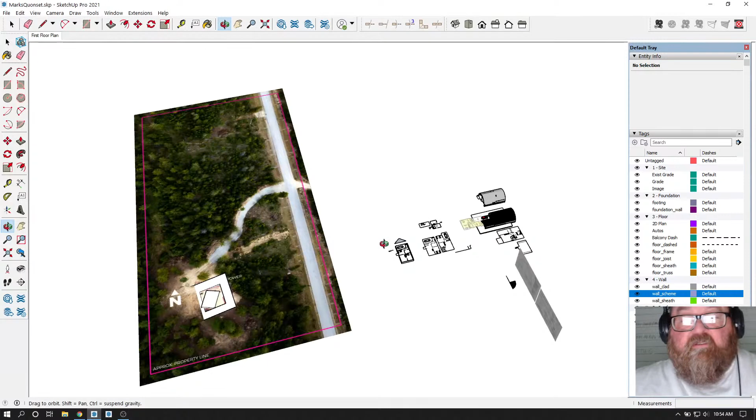All right. So this has been an unusual project for atdrafting.com.

This project started out as Mark contacting me. This was a model that his brother, who's an architect, did - kind of a schematic model. They wanted to build this Quonset hut house, and they actually put down a deposit, and excuse all this drawing stuff here, I'm getting ready to delete it all. But he wanted to build this Quonset building home, so I got the specs from the company and drew

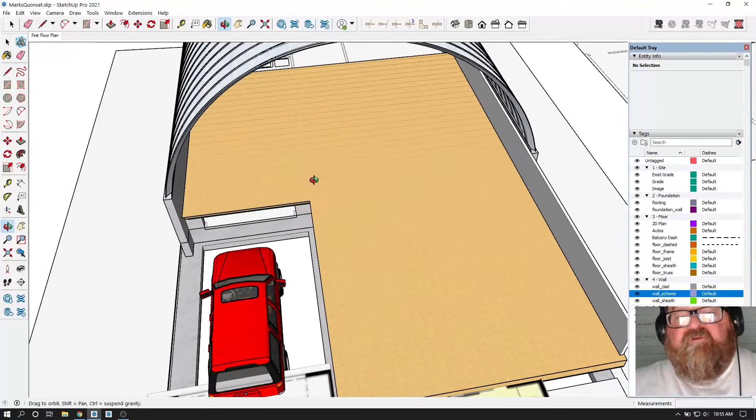the Quonset panels, and we put them all together and came up with a floor plan. And the more we talked about it, you could see I was in the process of doing the floor framing and all that. During the process of our discussions, I was able to, how do you politically correctly say, talk someone into something? Anyway, we're to conventional methods now, so we can delete those.

I don't want to go into that too much because I want to get right to this. But the decision was made to cancel the order for that. There's a lot of reasons behind that, mainly due to hidden costs that you don't see when there's a lot of content on the internet - there's always a backstory you're not seeing, always hidden costs, always issues in real life that you don't see in videos on YouTube.

So that being said, the realism came flooding in, and wisely I think Mark and his wife Pam decided to cancel that, and we were going to move forward with designing a simple house that's going to cost less to finish and is more easily made energy efficient - just easier to design around the spaces they want, easier to build, easier to get windows and doors in around the perimeter.

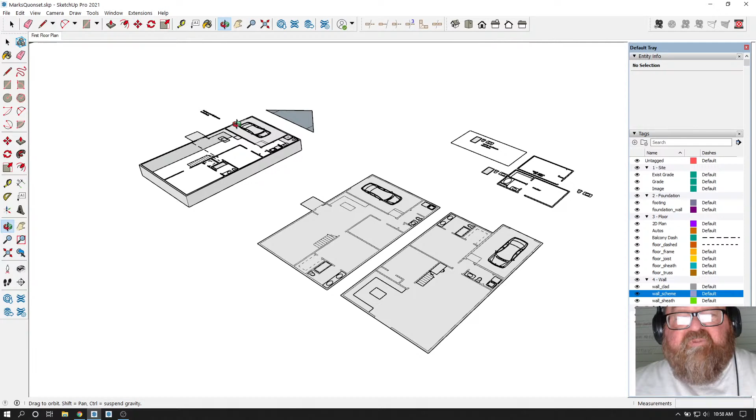And I always love it when people agree to simplicity - that can be, I love simple luxury, let's put it that way. Your life can be luxurious when you're not in debt up to your wazoo, whatever that means.

Anyway, we went through a couple of plan options here. We're trying to shoot for between 1,200 and 1,500 square feet. So finally I drew a rectangle and said, okay, this is our perimeter. We're looking at about 32 by 54, something like that. And the reason it's that big is because we've got this garage we're dealing with, a single car garage.

So what I'm going to do is clean up this drawing. I'm going to get rid of everything I don't need. Let's see, do I have all my plumbing? Yeah, I've got all my symbols, all that.

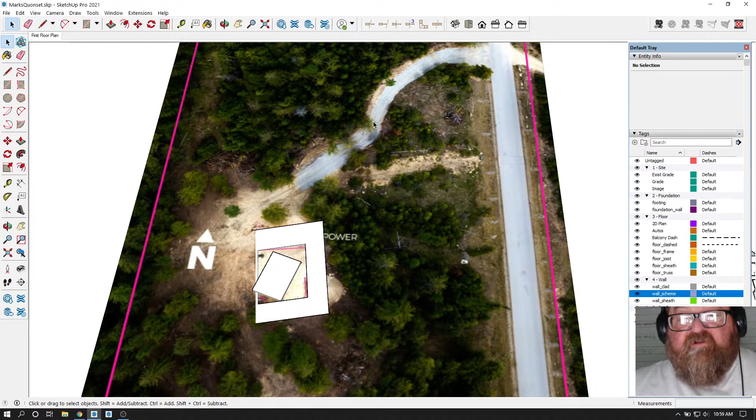I'm going to keep this site. This is a picture he took with his drone - pretty good picture, actually. Let me look at it straight down. The lot basically runs north and south, so we've been playing with how to orient the house to get the best approach into the garage and their view and all that. So we came up with this where I was trying to get grade information - that's this slope right here.

It's kind of a long story, but the contractor cut out this notch in the site because he needed dirt for the driveway somewhere. So now we're trying to rotate the house to best be suited on the site, and then all this will be regraded after the house is built. So that's kind of the pre-story, the backstory.

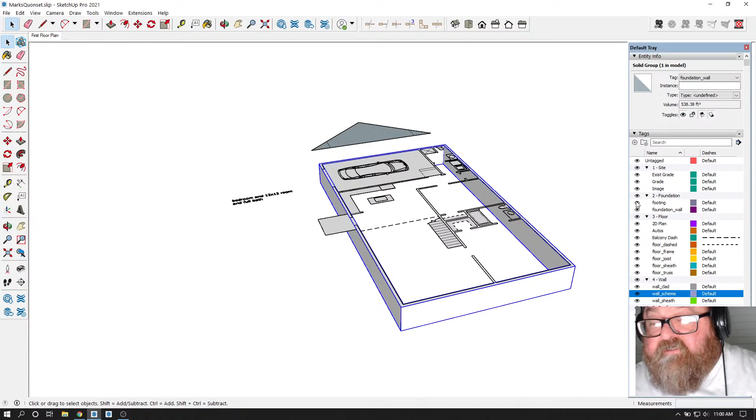Now what I want to do is get just some quick layering stuff done. I want to put this in foundation wall, and I'm going to turn that off for a second. I was kind of showing him some sectional work for the attic - I'm just going to delete that because I don't need that anymore.

Y'all have to remember I'm hard of hearing and sometimes I slur words. Anyway, let me see if anybody's watching. Hey, we've already got a bunch of people watching. That's cool.

He hasn't checked comments yet. I'm checking them. Nothing can cost less today. Oh yeah, everything, oh yeah. We can always have a project that costs less than one you originally dreamed up. Trust me, I'm an expert on that. And this is one of them.

We went from a Quonset building to traditional framing, which still is going to be cheaper. Mark and I have gone through this evolution.

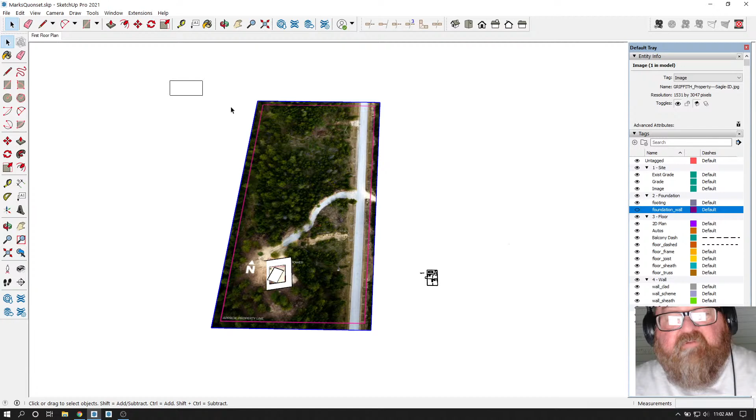Let me continue to work while I'm talking. I want to put this image into this. Oh, it's already good. But what I want to do is rotate this, make a group out of all this, and then place it. I want to start getting things straightened up in this drawing because they've been a mess. I'm going to put it right. Get over there, get over there. There we go. Now I'm going to rotate the...

Because I want to work with my drawing on this axis, it's easier to work with. I'm going to rotate the site. And you know what I should have done? I'm not going to worry about it, I'm just going to rotate this.

So that I can work on the building. I'm going to delete this one because I don't need it. Let's see, let me explode that. So there we go, now I've turned my new foundation back on.

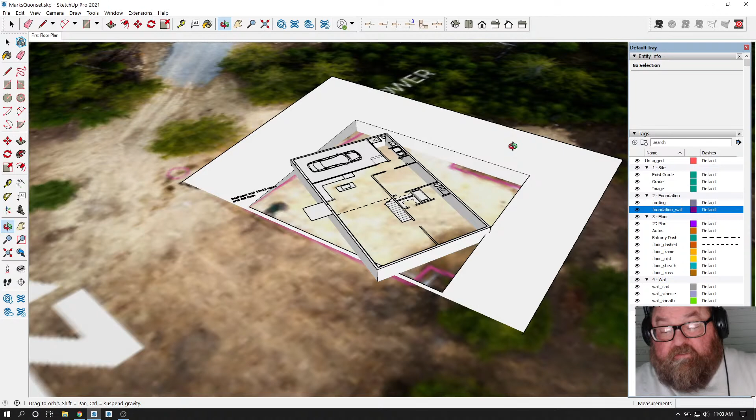Sorry, I was getting a text from another customer. So that's going to look good.

So now I can turn off some of this stuff to be able to work. Let's see, is this grade? I want this to all be a group, and I want it to be the grade layer, so I can turn that off. And now I can just work. I want to turn off the foundation.

And I'm going to draw myself a rectangle. It's going to be my floor plane, the floor. And I know it's going to be about 12 inches thick, it's going to be my floor system thickness. So I'll make that a group, and I'm just going to leave it right there for right now to give me a background.

To zoom in, because when you're over here in space, sometimes SketchUp goes kind of nutty. But what I'm going to do now is, let's see if I've got this in a group. Do I have this in a group? Let's see, is this 2D text? This...

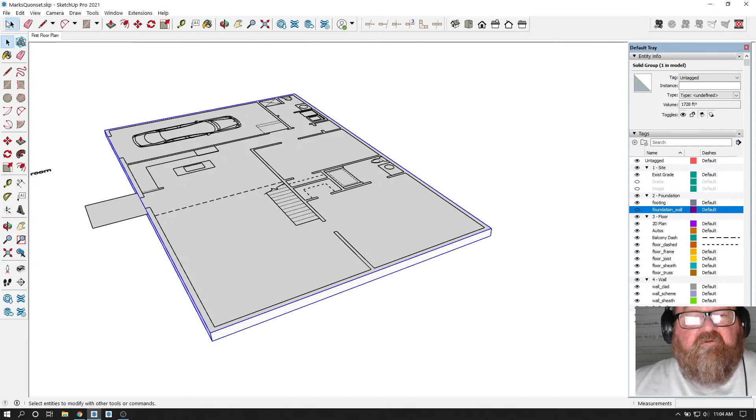Let's turn it off. So this needs to go—sorry, there's a bit of organization here. Let's see, I need to put this in floor frame, and then turn that off for a second. And these videos are really for the owner, but I like to do live streams because that way...

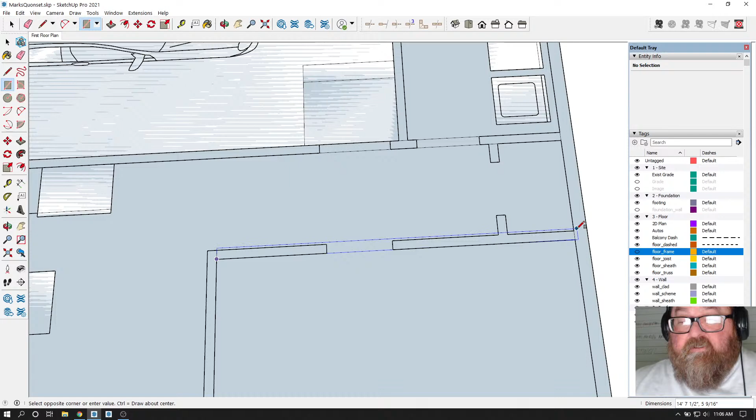What I'm going to do is I like to keep a two-dimensional plan. Like I used to take this two-dimensional plan and just raise up the walls that I had already drawn. But now what I like to do is keep that two-dimensional plan as a separate item, a separate layer.

Let's go in here and see if I got all my walls. I can tell by—oops, wrong one. This, that, yeah, so now I can go around, now I can turn off, put this on 2D plan, turn that off. And now I can go and clip out all these little lines between the walls. Oops.

And the goal here is to get this up in 3 dimensions so that we can start to talk about space and time.

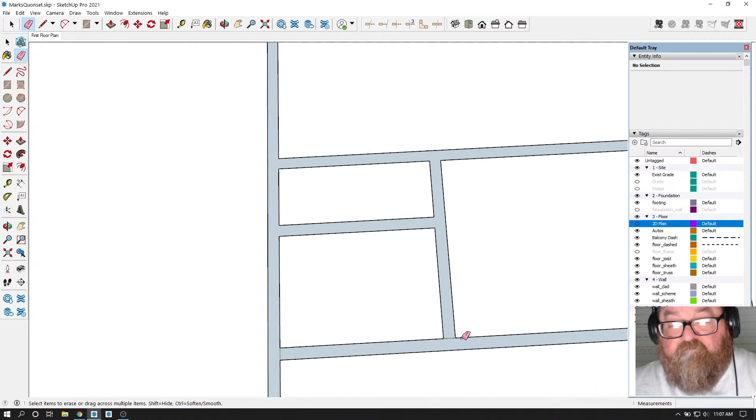Something happened where I didn't get this connected, so I'm just going to draw. I really don't like doing that because I'll end up with lines I have to fix later, and you'll see what I mean when I pull this up. There will be little interference lines there now.

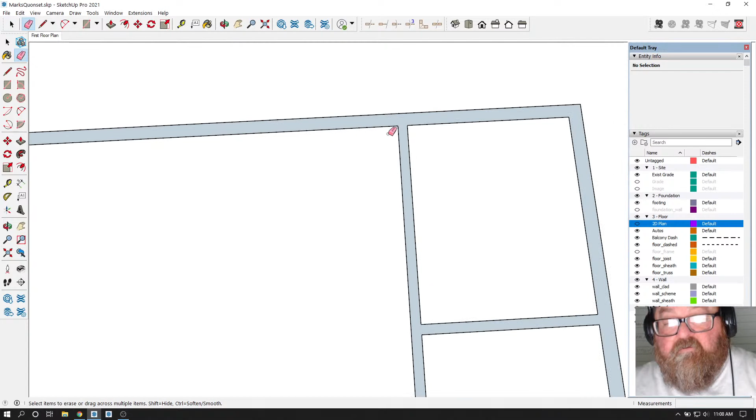Okay, got that, probably missing some down here in the corner. Now we're going to have 9-foot walls, and 9-foot walls are 9 feet 1 1/8, because your studs are 104 5/8, and then you have 4.5 inches of top and bottom plates. So if you want to draw your walls correctly, 8-foot walls are 8 foot 1 1/8, and 9-foot walls are 9 foot 1 1/8.

We have to start out with, if we want a project to meet our budget, a little under what we like. If you think you can afford 1,800 square feet, design it to 1,500 square feet, and you'll get into, you'll fit within your 1,800 square foot budget.

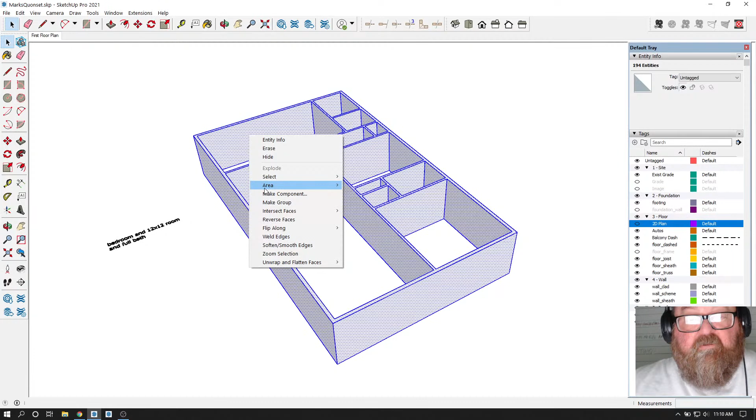So that's our walls. Now I can make these a group, triple click and group, and those will become, I like to put these in the wall scheme layer, not the same layer as later on when I start doing real walls, I'll use Medeek's extension, which gets into framing and siding and sheeting. But for now I like to keep it on schematic mode until we get past the schematic phase, which is your first real kind of thing phase.

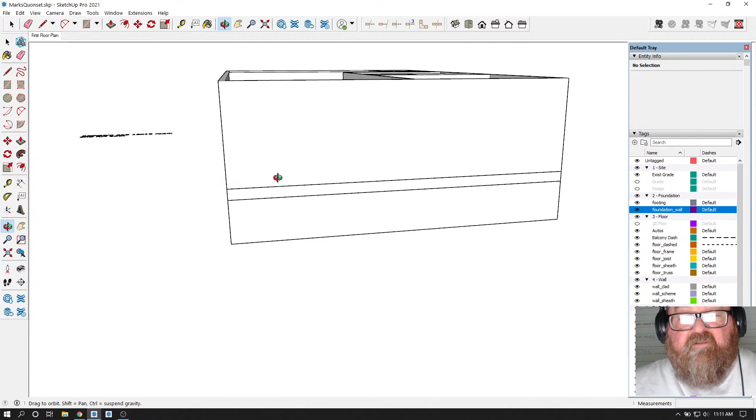Let's turn on our floor. I don't think I have the floor on the right elevation. I do. It may be that I don't have the foundation. Let's see, foundation walls. There we go. So there's your kind of layer, your plates. We've got our foundation plate, our floor plate, and our wall plate. Eventually all this will be replaced with real stuff. This floor plate will be replaced with real joist and subfloor and flooring, and this layer will be replaced with real concrete block and piers and footings.

If you've watched any of my other videos, you'll see that coming soon on this. But this is how I like to do it, just to get past the discovery phase.

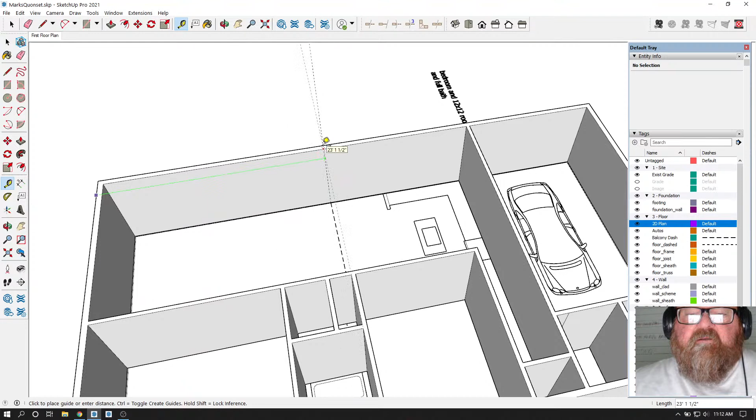The interesting thing about this house is we are going to have, let's turn on our 2D plan again, a loft area, sort of a second floor area, starting right here where this dashed line is. I want to make sure that's a good dimension, maybe 23, 1.5, or 30 foot 10.5. Maybe I shouldn't worry about it now. I like for things to be logical, like when I'm talking to my framer, I'd rather say the loft starts at 24 feet or 23 feet instead of this ambiguous 23 feet 1.5 thing. But in this case it might have to stay because I've got that loft lined up, I thought, with this wall.

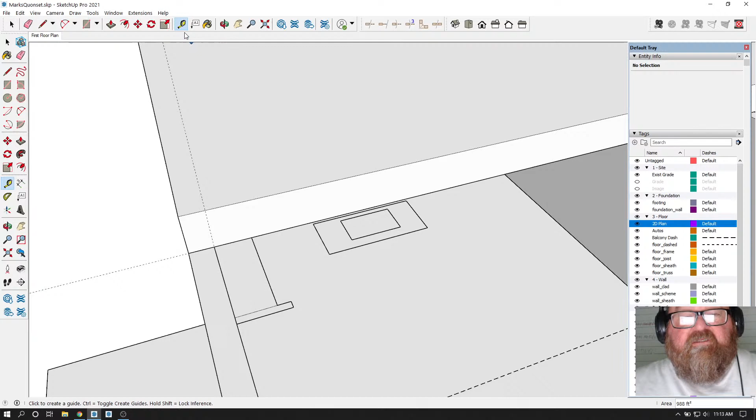And so we'll discover that in a minute if that's true. Now I'm going to draw a floor plate right there, and I know it'll be about 12 inches thick, let me make it 12 to start out. I've got this distance right here to consider, 16 feet. It'll be 11 7/8 plus, let's go down, we'll use 1/8, then we'll come up 3/4 for our subfloor, and we'll leave it right there for now.

And then we'll make that a group. What that will do is show me, no, it doesn't exactly line up with that wall. I think what we did was we made some adjustments to this wall based on adding this little closet right here. Let's see if I have any more comments.

See, I wore you all down. No more comments.

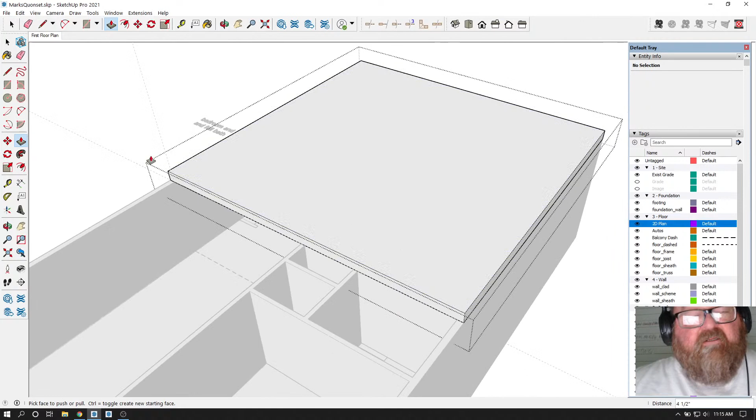Like I say, these videos are for the owners. I do them for them, but I like to share them with everybody. They will get boring for people who aren't involved in the project, so I can't make it any more entertaining. I'm sorry. Work is not always entertaining.

Do I want to tell the contractor it's 30 feet 10 and a half or not? That's for my framer. The other thing I'm dealing with is I want this entry here to be centered, and I've got 6 foot allowed for it, and that's basically where it ends up. So I'll leave it there for now and be embarrassed when my framer asks how far that comes over. Actually, it'll be dimensioned on the plan, so that's okay.

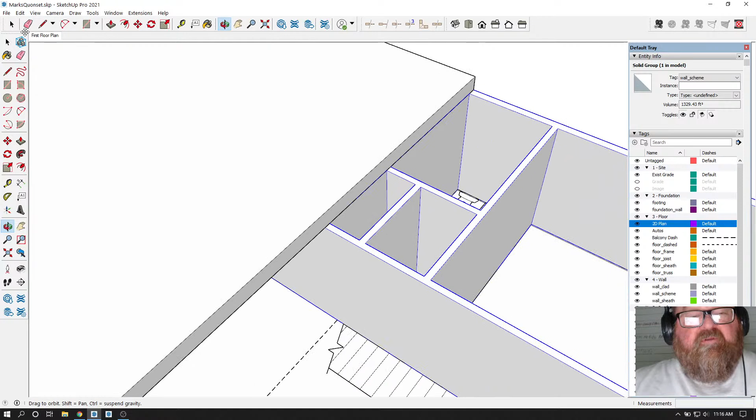But the main thing here is we have to decide where the vault goes. What'll happen is this wall, and I'm going to have to draw my roof shape to know, but this wall right here is going to extend all the way up. So I'll have a line here and I'll have to separate these walls for now. I'll put another little line there and there, and separate it here too, so I can pull this wall up until it meets the roof.

And then these are those little interference lines I was talking about that I have to go back and delete if I want it to look pretty, which I do. I want my models to look pretty. So now let's see, did I wear everybody down? I did, I wore them down, so now I can work.

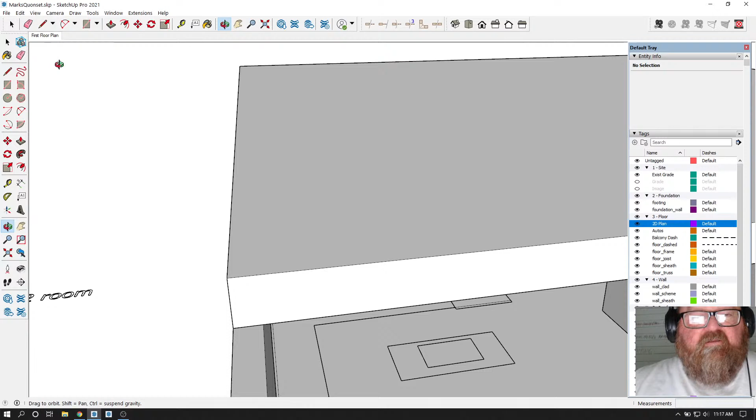Now what we're going to do is draw a roof plane, a roof layer, a roof schematic, and I'm thinking I'm going to have a 3.5 inch seat cut, and then let's go 12 inches, and then we'll come up 10.

Where's my blue axis? 10, and then we'll—is that it, is that my 3.5? Yeah, that's a minimum seat cut for me that I like. I don't want anything less than that, because I'm not sure exactly what I'm going to be using for rafters. I'm pretty sure it's going to be 11 7/8.

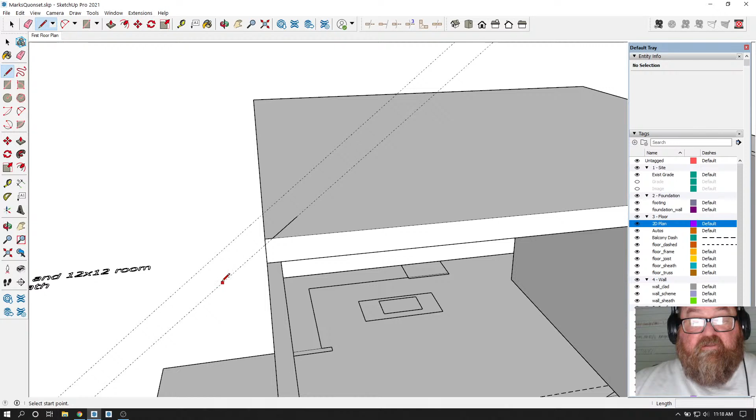Let's see, I may want to—I'm going to have to research the seat cut and see how I'm going to use these. I'm rambling, I know, sorry. The wood I-joist that I'm going to use for rafters—one of the issues we're dealing with on this is that we have a 60 to 70 pound snow load.

And why didn't that connect? Why did that not connect? There we go.

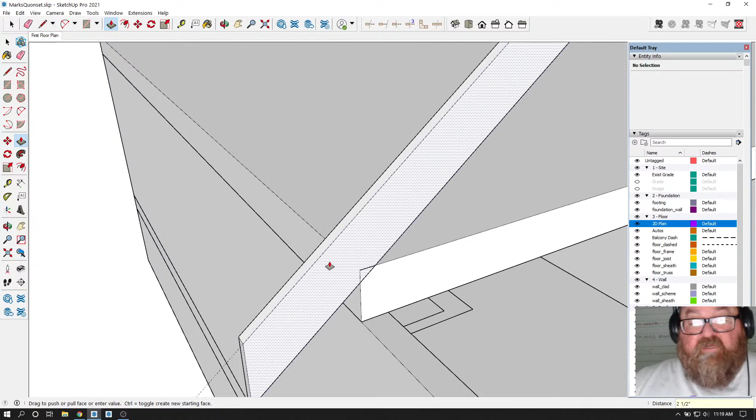What I think I'm going to do is go ahead and draw these, I think they're 2.5 wide, and I'm not going to draw the whole thing. Let me make that a group. Actually, I'm going to make this a component, and later on I'll make it look like a wood I-joist, because what I want to do is copy it now.

What I do want to have is something that's real enough to get my headroom properly shown. 180—let me get over here, I can see that.

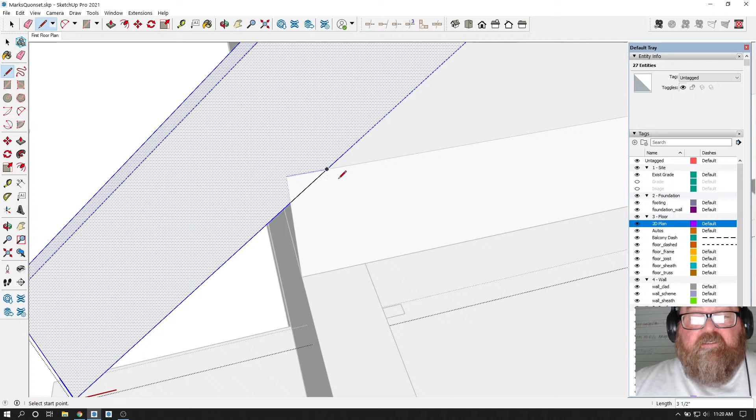I didn't draw my bird's mouth on there. Let's go over here—see, since that's a component, I can go back over here and draw my bird's mouth, and it won't show up. Well, that's weird. Looks like I did have it there. No.

Why are you acting strange on me? Let's go all the way over here and come all the way down here. Why's that acting funny? Sometimes—oh, it is working. Okay, I just couldn't see it.

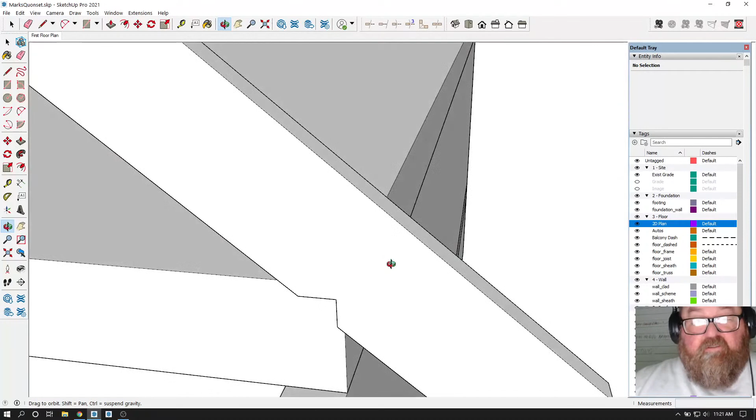Oh, I know what it was—that guideline, delete guides, was interfering with my ability to see the line I had there. So the reason I did that is because I want to know where that bird's mouth is, because this is supposed to be notched out all the way across, and it's not, but it is on this side. Now I've got to figure out why it's not over here.

Just—what's that song? Constant sorrow. I'm a man of constant sorrow. Well, there's the bird's mouth—it's like it magically appeared on this side. Me and Barrett need to cover that song.

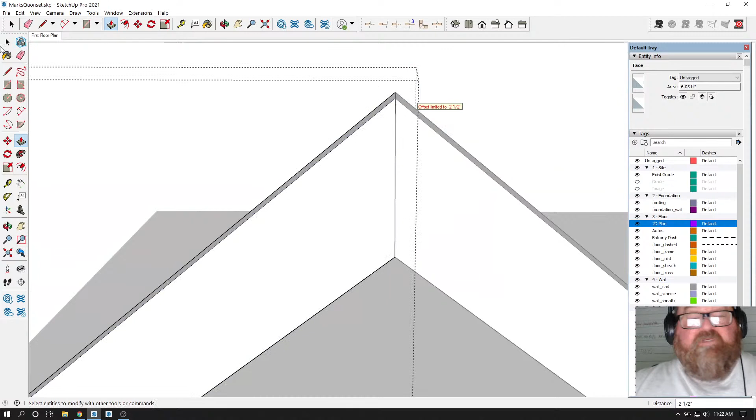Alright, so that, and we'll have a ridge beam, and you'll see why I made these components right now, because now I can just draw myself a little line right here and get rid of that. And magically the other one's going to fix itself. It's magic. Now eventually I'll have a ridge beam and all that.

You know, a ridge—not a ridge beam, but a ridge, no need for it to be, could be a beam. The difference between a ridge and a ridge beam is that a beam is more or less supporting, it becomes a structural member supporting the rafter load, or this half of the roof load. Therefore, you can kind of eliminate the need for rafter or collar ties and that kind of thing.

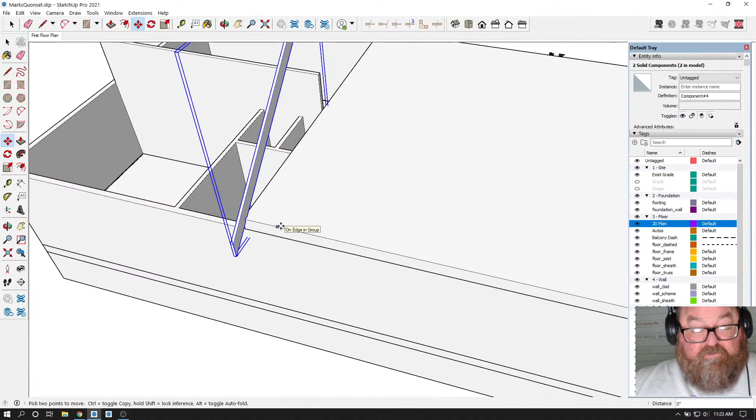Over a vaulted area, I like to have a ridge beam, and that way I can keep it a true vault. I don't have to have these weird flat spots unless we want them, or unless we want an area to run ductwork or something like that. But we want the choice. And these are going to have to be on 16-inch centers because of the 60-pound, 70-pound, whatever it is.

I think I'm going to put 30 of them in there for right now. And then I'm going to move them all down to the end so I don't waste them. Don't want to waste my stuff I made. Yeah, let's just grab a bunch of these and we'll...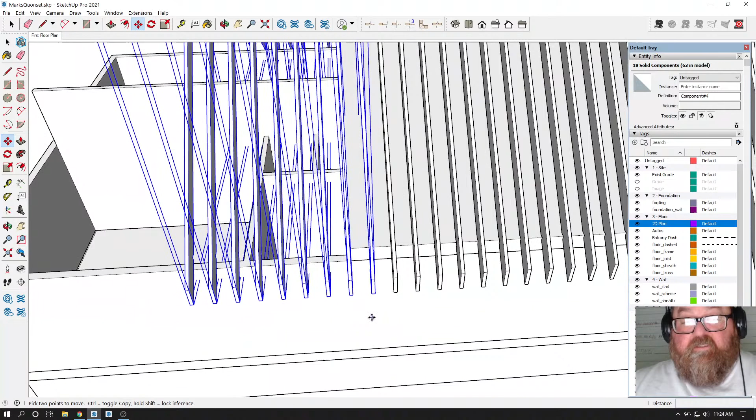Got close, didn't I? Let's go one more. Why does that look like it's closer? That's because they're wider than a normal rafter. Aha, and we just exposed our first issue, that this wall, or these walls, will have to be raised up.

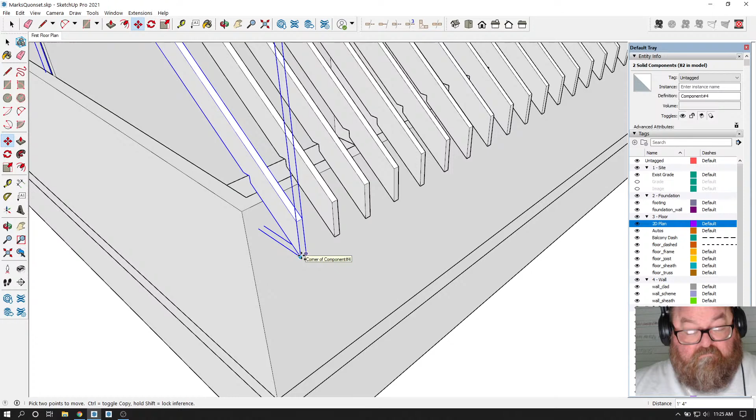But let's put these on here, because what I'm going to do is - why did I delete that? What I meant to do was copy it and then put one flush with the end, and unfortunately that's going to be close together. It's no big deal, it just has to remain on our layout. Oh, I know why I deleted it, because I wanted to copy - I wanted to keep these. I wanted to copy both sides at the same time.

And I'm going to suggest a 2-foot overhang. So for now, I'm going to run out 24 on both ends. There we go.

And now I'll put those in my roof framing layer. I refuse to say tag. I'm not going to yield to SketchUp's new tyranny, tag tyranny. I should write an article, tag tyranny. Roof framing, roof frame, there we go. Now I can turn those off.

Because I know - see if I have any other comments. Nope, wore everybody down, I wore them down. Am I still, yeah, I'm still live streaming. Am I? Okay, good. All right, so now what I'm going to do is turn those off.

Roof framing. Roof. Where? I've got things that are out of - all this needs to go in. Wall, and I don't know why there's a space there. Oh, I know what happened, I did that. I was demonstrating that extension, and that's how I ended up with all those layers.

Roof. Let's see, did I not just have a layer roof? Oh, that was floor frame, that's what I did wrong. So what I need to do is create roof frame, and put it in there instead. R-S-T-U-V-W, I know my alphabet.

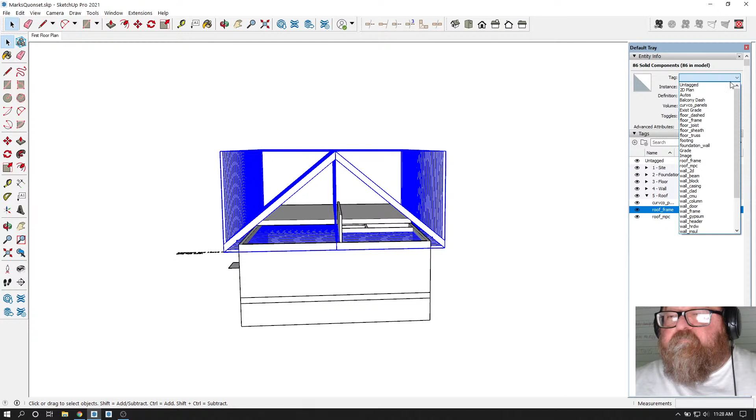They all need to go in there. What I really should do is - a good CAD standard practice is to keep all these in the untagged layer, and then make a group and put the group in the layer you want it to be in. Don't put your geometry in the layer, put your group in the layer. That way you can nest the groups in different layers. Let's see, roof frame, there we go. Now I can turn that off and I can raise these walls up.

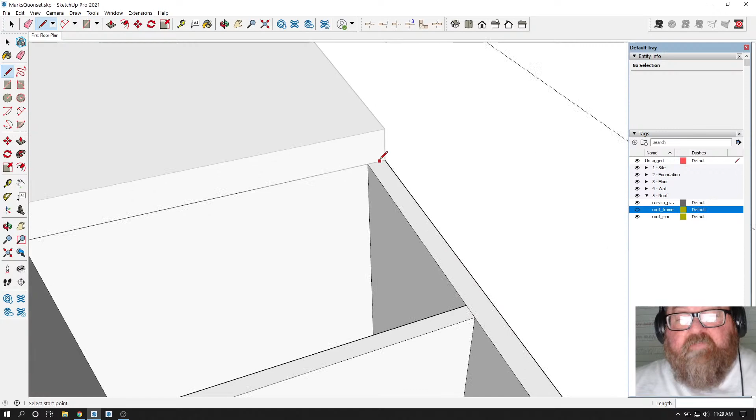So this one, I should have left my little lines in, shouldn't I? Would have made this easier. That's already separated, just separate this. And now these walls will have to come up to there, see?

And actually what we like to do is run a plate on top of this floor system. So it'll actually come up another 1.5 inches like that. And then we'll have a plate that we're going to call part of - what are we going to call it? We'll call it part of our roof framing or something. Let me think, and we'll come in.

Let's see, that'll be 6. Let's see, we got 6. Is that - why does it look like it's more than 6? My eyes are watering for some reason and I can't see a freaking thing. 6.

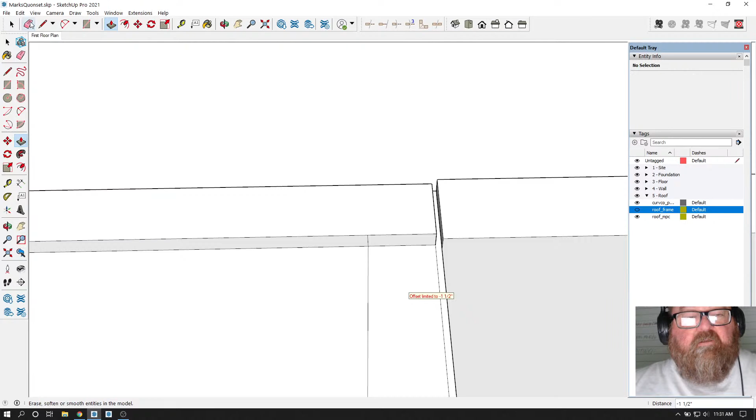And then this will be a 1 1/2 inch, and then that's your plate. That's a little more detail than I meant to get into right now, but I was afraid I would forget to do that later on. This won't be there, it will just be around the edges.

And I need to - why is that doing that? This is its own thing.

That needs to be deleted. This needs to be butt into that. You see, this is a plate nailed down on top of the floor, so it's going to be set back a half inch. And I know I'm getting into a little too much detail right now, but I don't think it's going to hurt anything.

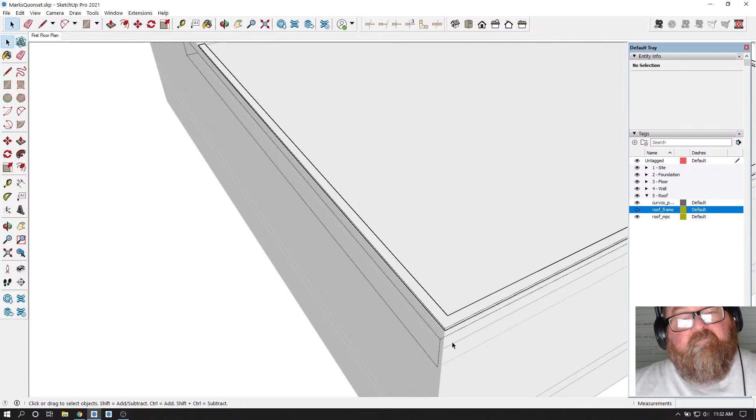It'll just be something there that I don't have to do later. And the reason we do this is because we like to have something solid wood to nail our roof system to, instead of the Advantech that's going to be the subfloor. We don't want to set our rafters right down on top of the subfloor. We want to have a plate there. And that plate, nailing that down, determines the height of this wall.

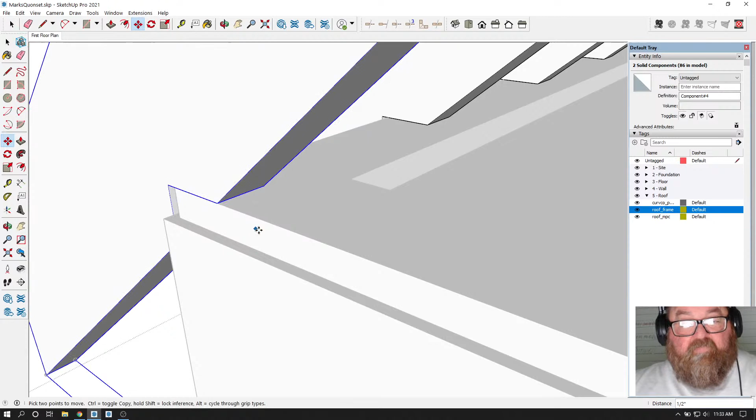And if I turn my roof framing back on, since I have it all grouped, I can just take that group now and raise it up that half inch. And these house line rafters will be on that house line framing, because you see the wall sheeting will come up and go by them, will bypass them.

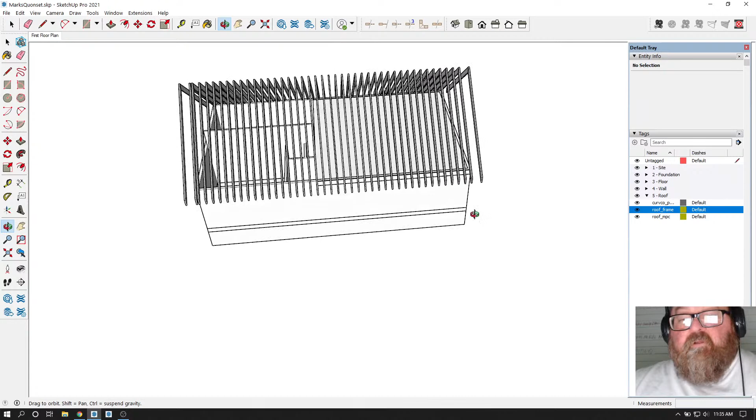Same thing down here. Something happened to my... there we go. Let's see if I did this one proper. Is this 24 from here to here? Oh, it's that half inch that's messing me up.

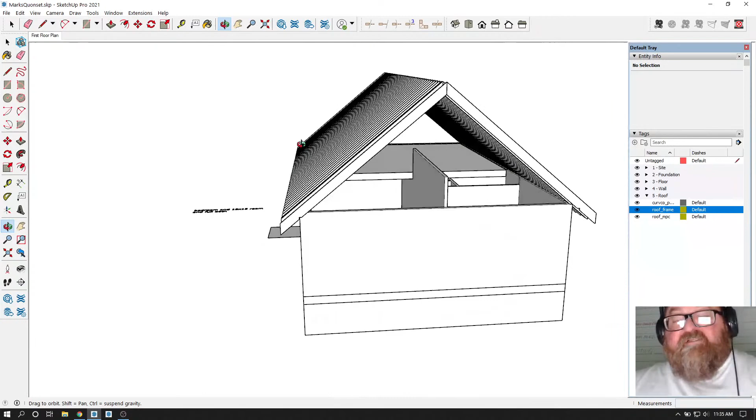So I need to move this back a half inch. And again, I always catch myself getting into this much detail early. It's honestly hard to keep yourself in a sort of schematic mode, because the first thing that'll happen is the owner will want to change the pitch of the roof, and here I am getting into that level of detail when I'm just going to possibly have to change it. Which is fine, that's their prerogative. But I have to train myself to keep from that.

And the whole point to that was to know how far this wall is going to have to come up. Or I just want to be able to show it.

Oh, hey. Are you going to work? All right, be careful, son. Alex is going to work. He's managing Taco Mamacita. He's doing really good.

Why is that not... oh, I know what it is. That wall's set back, so I'll have to kind of come in here. For now, what I'm going to do is just show it right here, and later, like I said, I'm training myself. Later I'll come back and make it a wedge, and cut the angle on it and all that. I just want to be able to see, give the owner an idea of what this vaulted ceiling is going to look like here.

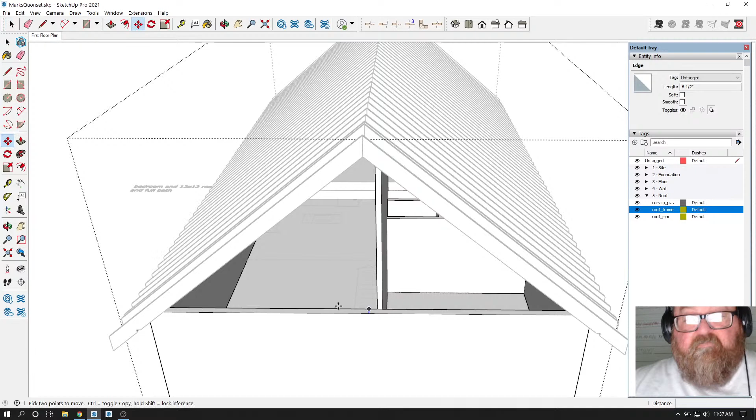What I can do is put myself a mark in the middle of this wall. Yeah, I knew it wasn't exactly in the middle, and then I can raise it up. I think I can raise it up without getting interference. No, I can't, can I? Because of this wall, so I'll have to draw it. No big deal.

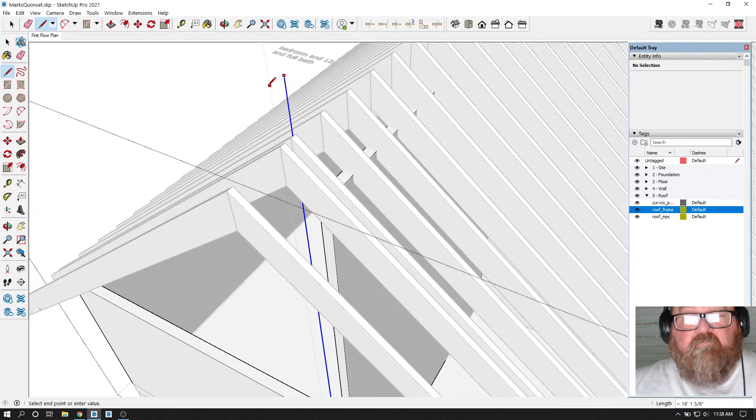So that means what I'll have to do is just draw this up to... well, how can I get to where I can see? Probably what I can do is just bring myself up two lines for now like that, and then bring up this thing like that.

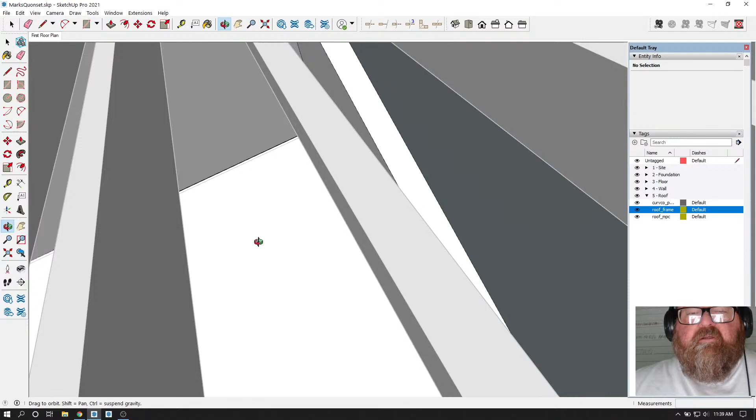And then delete that like that, and then do the same. I should have done the inside first, it would have been a lot easier. Now I've got to manipulate myself around and through this maze of rafters.

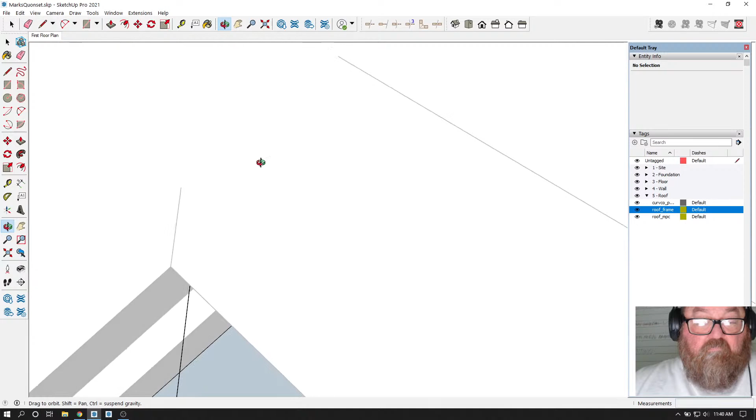There it is, I found it. Right. I think I'm just going to leave those horizontal lines for now and just get rid of the vertical ones right there, and these like that.

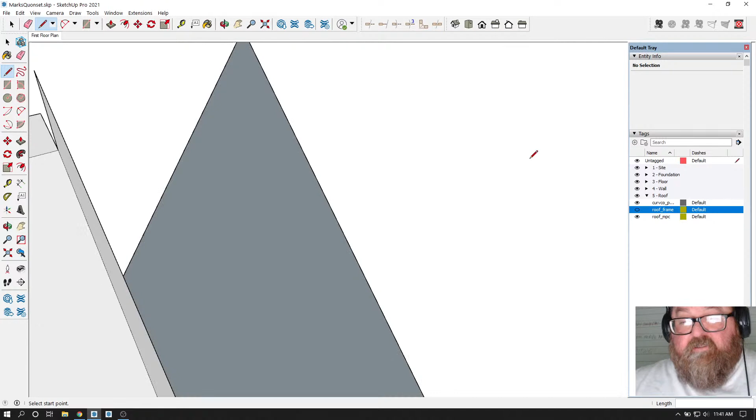Then see, we can turn the roof off and draw ourselves a line. This will be easier. Oops, I need to go back into the group and edit it. That will give me my little... bring this over and bring this over.

And see, now I've got a different wall over here, a different situation here. I've got to bring this over like that. And then this is where I'm wishing I had left this alone, but I'm going to go ahead and just draw this wall. Let's see.

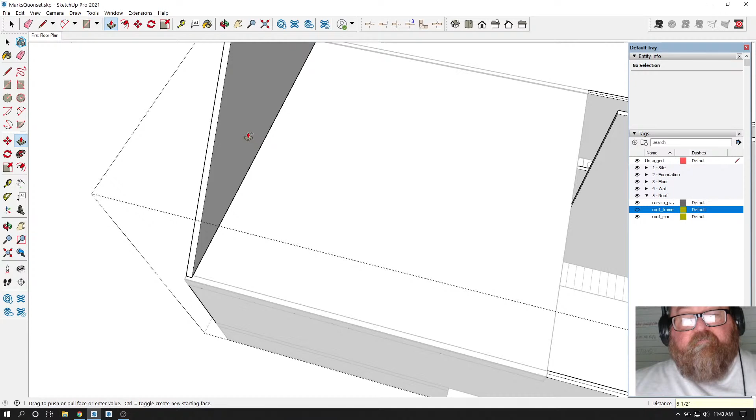And then I can just make this 6.5 like that. And then I can turn on my roof again, and I'll have it in the wall kind of where it's supposed to be, and reverse that. Oops, what did I do?

There we go. There we go. Now, let's see, what I'll do is go ahead and make myself a plane. One thing I just realized is I never really fixed the overhang of these rafters, but that's easy since they're components, because this would be 22.5.

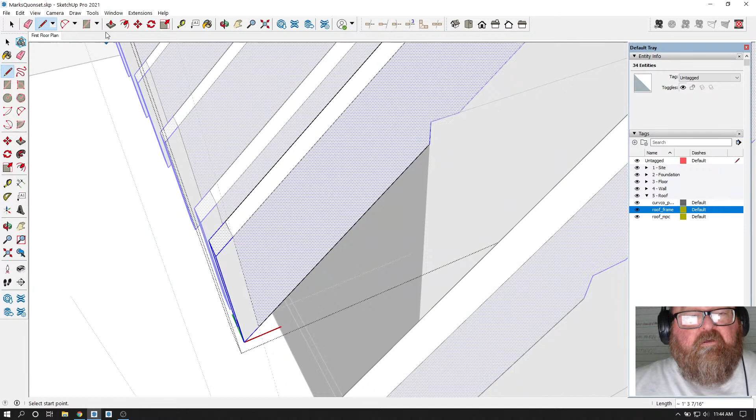Should have drawn that straight down. Now I can draw myself a decking plane. Let's see, I want to be out of the rafters, I don't want to be inside that group, I want to be outside that group. Is it not going to let me? That's weird, why wouldn't it let me go all the way to the point up there? I'll move it up there.

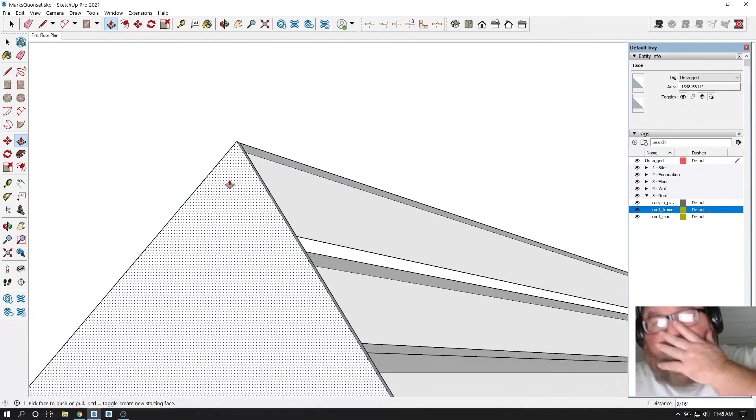And then we're going to make this at least 5/8. And make it a group. And that's going to be my...

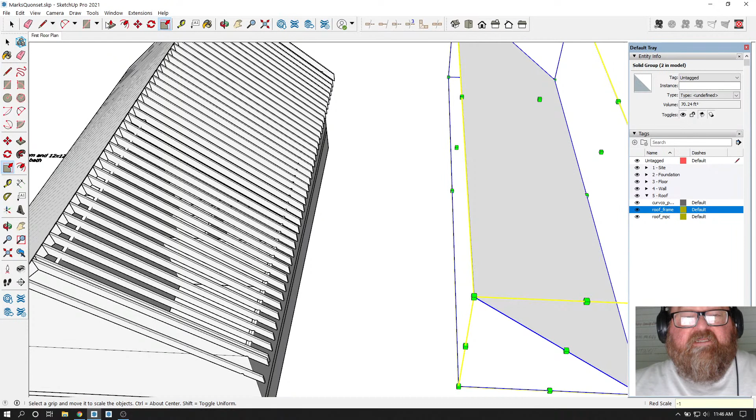Now see, Ray, I know you're not still watching, but if you are, you need to go tell SketchUp how to fix this issue where, depending on what angle you're at, you can see through. You see, I can see the rafters through the decking, even though it's 5/8 of an inch thick, and these are not transparent surfaces. You can still, and as a scientist, I think you could fix that. This is one reason why I'm kind of hoping they're aliens, because some of the things that humans are too lazy to fix, like cancer and all that, and why, and I'm not making light of cancer. I think we could fix that if we tried hard enough. If we can come up with a vaccine for a pandemic in a year, we should be able to fix cancer after 50 years of research.

Anyway, I won't get off on that tangent. So that's kind of a rough look.

So now I need a layer called, what have we got? I need roof sheathing. Roof sheathing. And I'm trying to keep these, I call it roof decking. Anything that's not vertical, I call decking. Like wall sheathing is vertical. Floor and roof decking is like the deck of a boat. You know, I like to say roof decking. But I'm trying to keep these layer names the same as what Medeek uses, because I don't want to have multiple layers for the same thing.

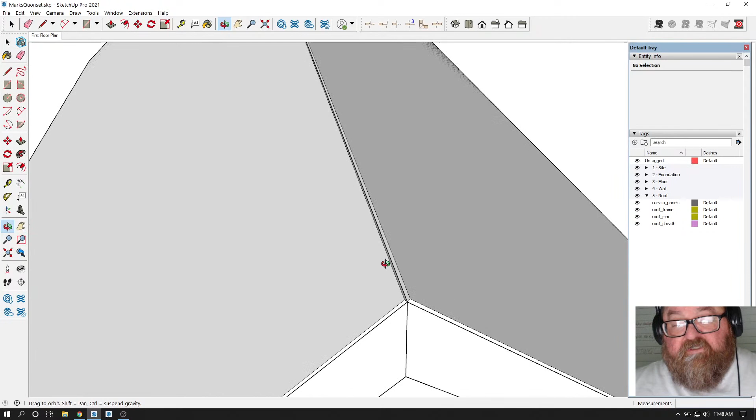So I'm going to take this and that and put it into roof sheathing. Then I'm going to turn them off, and turn off my framing. Now I can look at my floor plan for the second floor, and also, interestingly enough, the stair. Now we've got our stair, our first and second floor is pretty accurate, within probably 1/8 of an inch.

I know that that's 10 foot 1 3/4. So I can take, this is a neat little trick, you take that line in SketchUp and go use the divide, and then I go up here and look and see which riser height I want. There's 23 at 5. I don't want that.

I don't want that. I want to get down here to around 7.5. 7 3/16 is a good one. Yeah, I want to go 7 3/16 first. You always want to kind of start off with something that's closer to or right under a half, 7.5. And what I've learned in the past is that sometimes with all the matter that gets between your stuff,

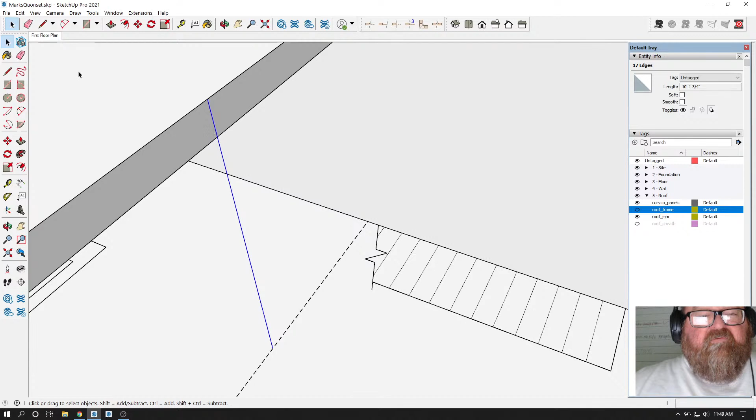Let's see, 36. We're just going to make this 36 for now. Where's that other one? That sometimes you end up with a, when you actually get ready to build your steps, you'll have a little bit more height.

And if you base it too high, if I base it on 7 5/8 now, and I've done this 100 times, where my stringer's at being 7 3/4, my riser's on the actual site, and it's frustrating. And I always say to myself, why didn't I just base it on something less, make group? Now what I can do, and so that's the logic behind it.

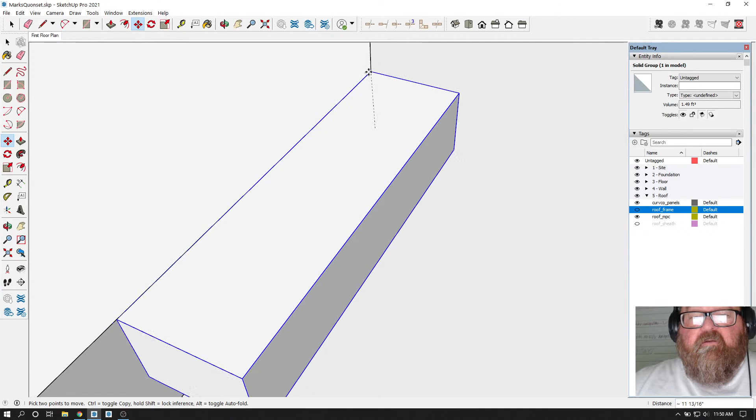And I didn't mean to do that. I meant to get that right on that corner, and I'm going to delete there. Now, this is a rough way to do stairs if you're just trying to see where they land. And again, we're in schematic mode here, so we're just going to block them out. They're accurate, they're just not pretty.

Let's try 16. And I knew that was going to be one. So what I'm going to do, you want to delete the top one. The top one is the floor, is your top riser. And I got to go one more, or where am I?

Yeah, I got to go one more. Why does that look funny? It looks like I'm almost there, but I'm not. Oh, that's weird. I was there.

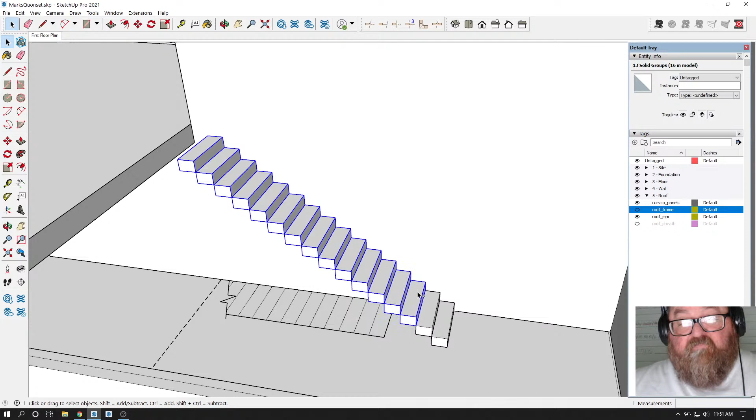Okay, so now what I want to do is group those. 2, 3, 4, 5, 6, 7, 10, 11, 12, 13, 14, 15, 16. So I had 17 risers at 7 3/16. Now I could have had 16 risers at 7 5/8, but I promise you, and I'm going to check this with my two-dimensional plan, I promise you you would have ended up having to have that extra riser, and you would have been frustrated because you didn't plan for it.

The reason I'm saying that is because there's a door right here, and I don't want the door. The 2D plan is on, I just have the walls in the way.

So let me turn off the, good Lord, up to multiple layers already. Wall frame. This is supposed to be in wall scheme. That's right. Wall frame will be the actual. There we go. And you see, that's what I'm talking about. See how I thought just guessing at where the stair was going to land and where it actually does land are two different things.

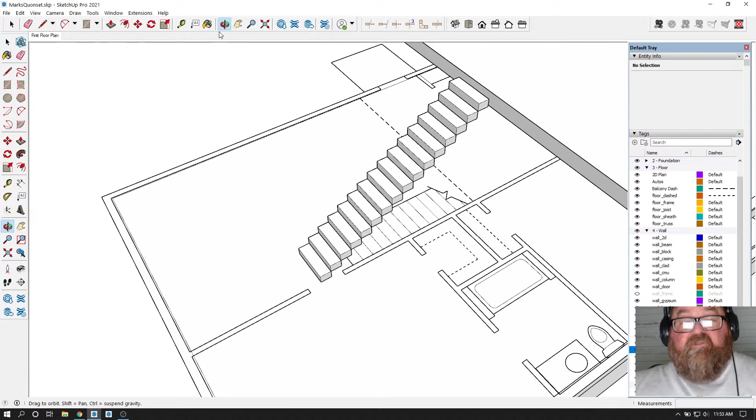Let's see if we've got 7 3/16. Now I could make these 7 5/8 and get that back to here, but I'm still out past my door, so I think it's probably worth moving. Let's see, am I editing that?

No, I'm not. Let's turn off the floor for a second. There we go. It's probably worth just moving this back, and I'll talk to the owner. Talk to Mark. I could talk to him right now if he was here. Let's see. I just want to move these 2 points out past, but that needs to be at least 6 inches this way.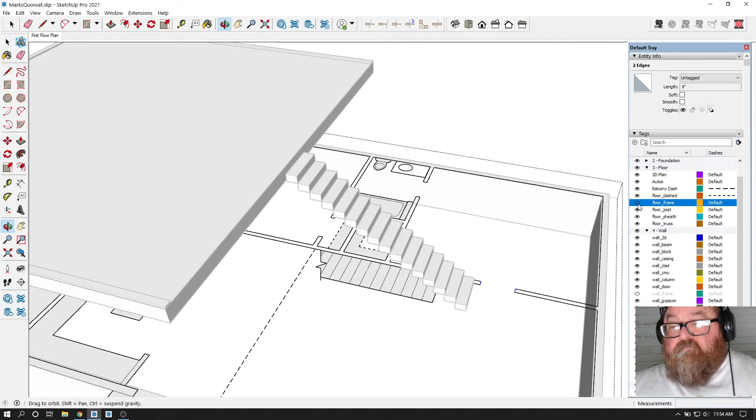I don't think that's going to hurt anything. I don't think.

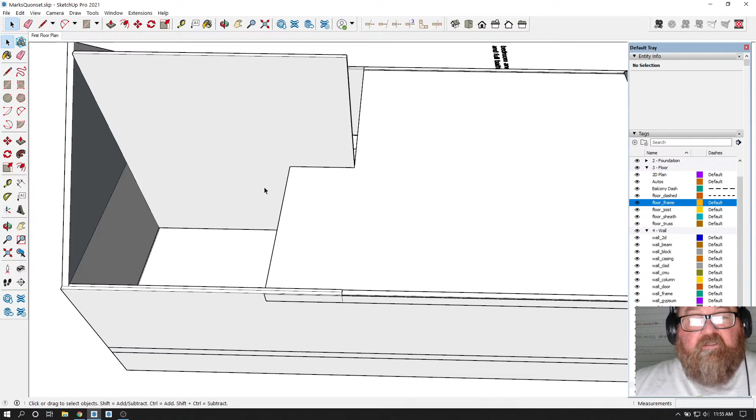So then the other decision is, does this wall, so what we would have here, let's just look at this for a second. Our floor is either going to come to here, or if you want to take in this square footage, is there a line across there? There certainly is. Why is that? That was left over from that plate. I knew I didn't delete all that.

If you wanted to, so that's your two options. Two options are running the floor to here and then vaulting the ceiling in the masters, which I think is probably not going to happen. I don't know. It's what's weird is you could say this floor space is more valuable on the second floor and not vault the, you see.

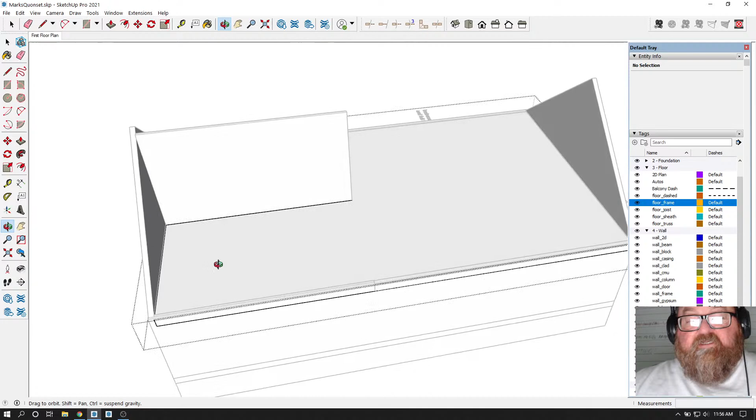So that's what I need to talk to the owner about next. Taking all that in, and because when I was talking to Mark, he didn't seem to put a high priority or high value on the vaulted ceiling in the master. Maybe that was just an impression that I got. So that's really the question.

And I think what I'm going to do is turn that on and that, and I'm going to get with him, probably go ahead and meet with him on this issue or let him watch this video, and probably would be easier if I took a screenshot that way.

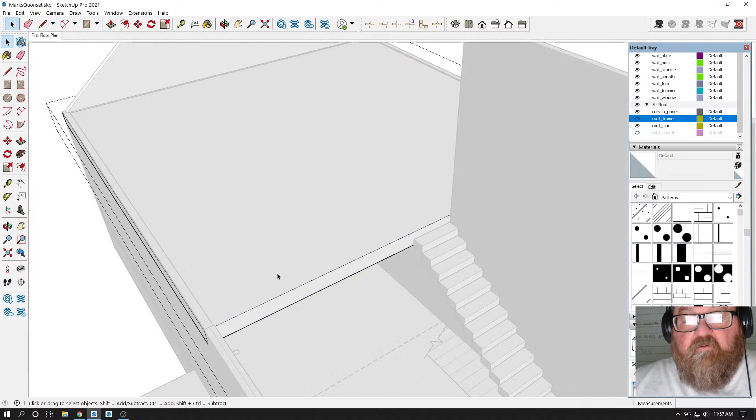Let's see, if I turn that roof sheeting and framing back off, now what I've got to do, what I would have here is a wall. Let's just draw it like this to get it started. That would be, let's just call it 12 feet by 4.5. Then we'll raise it up 36 inches.

Wait a minute. Was I editing? Yeah, I don't want to make it part of that floor. I want it to be a part of the walls. So let me do that again. Let's make it 10 feet by 4.5. And then we'll raise it up 36 inches.

And then I'll clip it. It'll come to there. And then it'll be at that angle, it'll be cut. As a matter of fact, I could probably just go ahead and guess at it.

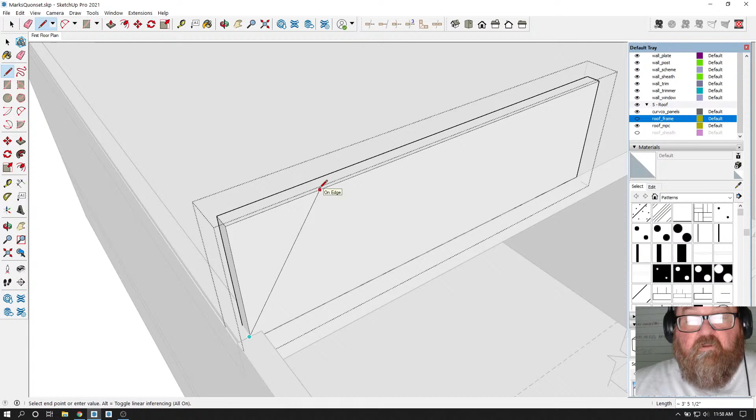Let's just make a guess. And then turn the roof framing back on. I wasn't that close, was I?

But what I can do now, since I'm still editing that, is put myself a reference line. That's really why I did this, I was planning on doing this. Let's grab that line and move it back to there, like that. That's easy enough. Then delete the guideline and turn the roof back off, and that will show me my thing.

And then what will happen is we'll have this wall come over to here, and then we'll actually have a wall. This will be another decision to be made. I would say it would be worth having a wall that goes all the way down.

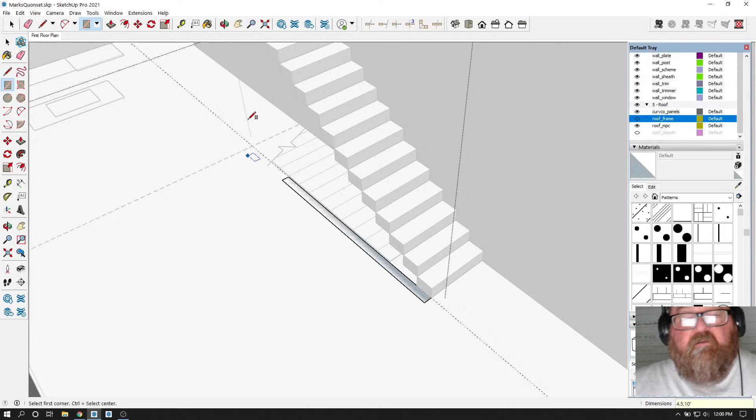So what you would have is, let's just bring it back here. Let's see, 4.5 by, what did it say, 10 feet. And we'll bring it up 36 inches for now, just for the fun of it. And then we'll bring this to here, and then we'll take this end, put this up. Well, we don't need a line, we can just bring it up to here. Well, I thought I grabbed that. Like that.

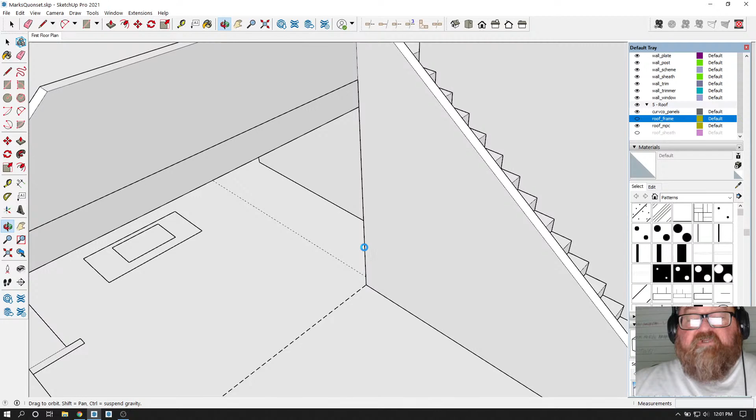The options are to either leave it open under the stair, or this is going to be a dining room area, or you could have a desk right here. So that's kind of what we'll decide. Or you could have a wall here that returns back to that wall, and then you could have a desk or a hutch or something in there. And then you could have a door here that goes under the stair for storage or whatever, storing your Christmas tree.

What is that going to be? 6 feet 8 by 32. Was I not part of that? That's weird. Oh, I was inside that group. That's cool. So I wondered why that looked funny.

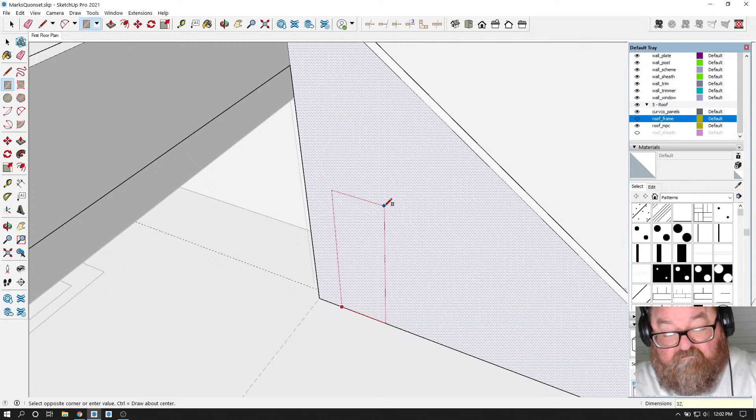There we go, something like that or whatever. So this is cheaper, this is a lot cheaper than a handrail system, right? Building this wall, which we're going to have to build under the stair anyway most likely, because most likely they'd want storage under the stair. So why not just extend the wall up another 36 inches? You've killed two birds with one stone. And this handrail system would probably cost $6,000 or $8,000 by itself.

So you see, you've got the framers already there, they're going to frame this up. You've got the drywallers, they're already going to be there, drywall this. You see, that's how you save money - little $3,000, $4,000, $5,000 at a time. That's how you save money right there.

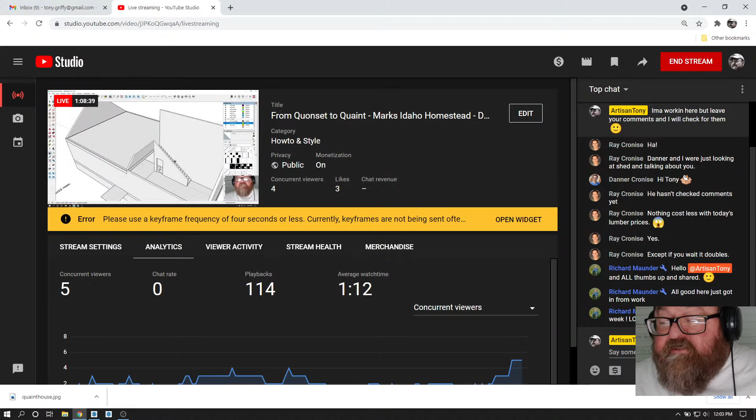So what I'm going to do is, I've kind of gotten down the road as far as I wanted to get. Let's turn all this back on. And I'm going to share this with the owner and have a meeting with them, and go from there. What time is it?

Yeah, 12, I need to jump on a call with the person I was talking to earlier. And so there we go, that's kind of part one of our schematic for a sort of a semi-permanent idea on what to do.

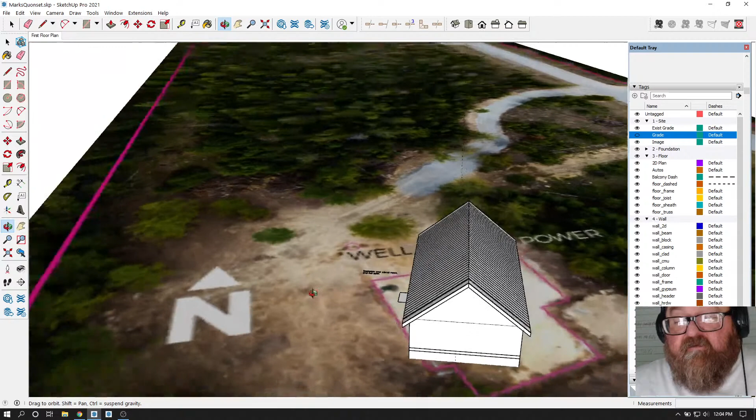Now I will turn on our site plan. Where's our site stuff, let's see. Let's turn on our image and our grade. Let's leave the grade off for a second. But that's what would happen - you'd come up and the garage is going to be right here. You drive up here, circle in, and they've got this area already graded. I don't know if you can see there's a pit that the contractor graded. And so that's kind of what we're working on.

And I wish they would fix this issue with, if you make this decking real thick, then you don't see through it - I haven't gotten to that magic point where something is thick enough to where you don't see through it anymore. I've got it at 5/8 of an inch thick right now. How thick do I have to make it so that I can back off here and show the owner what a solid roof would look like without having to see the rafters through the decking or try to manipulate the view.

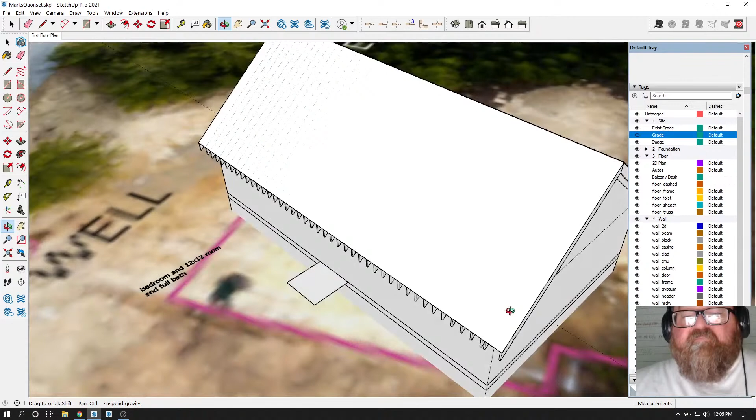You see, I don't want to be this close, SketchUp, Mr. SketchUp developer. And I know what happens is SketchUp blames it on the hardware, and the hardware people blame it on SketchUp. So anyway, I've been preaching about this forever, and nobody ever does anything about it. That's why I'm for aliens, I want the aliens to come and solve this. I know they can. And maybe we'll get disclosure next month.